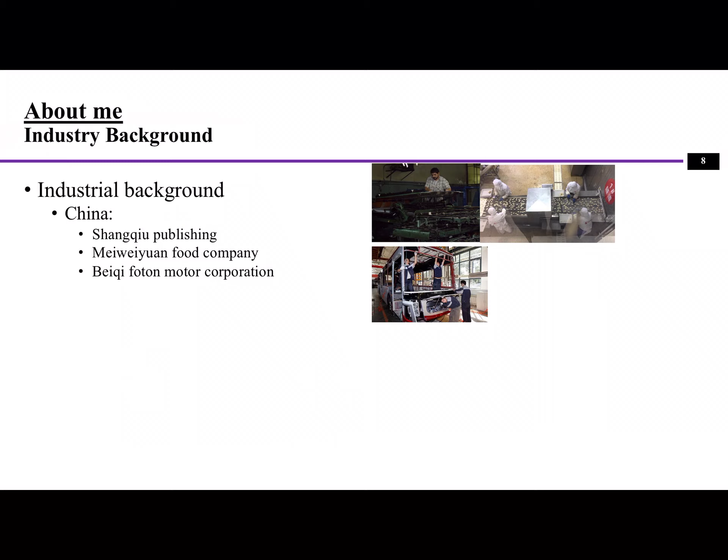In China, when I was in Beijing, I had some internships, and I was working as an intern at Beiqi Foton Motor Corporation. The factory was making buses or tractors. I was there to conduct some projects and also work as an intern to collect some of the data for the management.

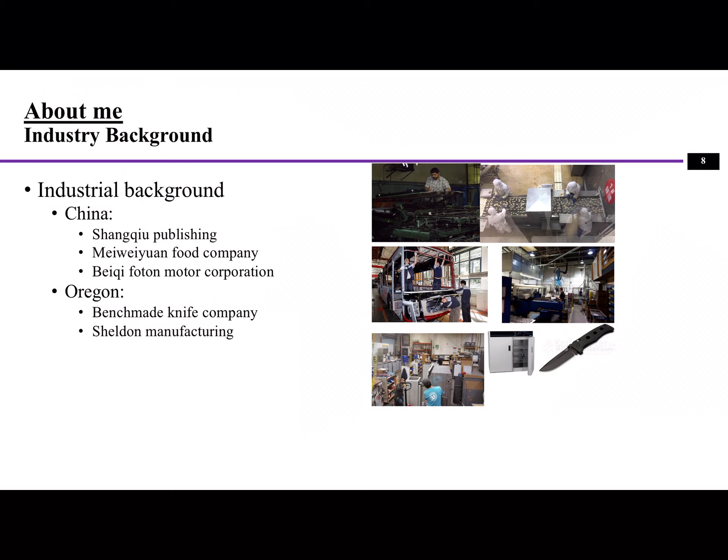In graduate school, I got a chance to work with multiple industrial collaborators in different industries. One is Benchmade, which makes knives used for outdoor activities or military purposes. I also worked on a project with Sheldon Manufacturing, where I spent almost 2 years with their employees as well as the management to fully study the company, from the mechanical or manufacturing process to the management part.

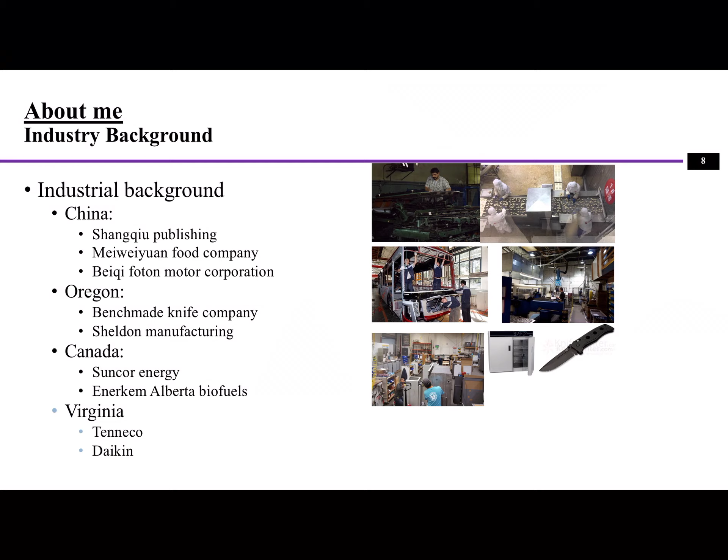In Canada, I was working as a research associate, so I had a bunch of projects related to industrial collaborators. For example, with Suncor Energy, I worked on a project related to GHG emissions related to reclamation. I also developed a process for producing biofuels from municipal solid waste for the Enerkem company. Currently, in Virginia, I'm also working with some local manufacturers trying to initiate some research projects for students.

With all my degrees in industrial engineering, I had different focuses at different levels. For a bachelor's degree, it's very general knowledge. In my master's, I was focusing more on mechanical engineering, studying tool life, machining, and processes. In my PhD study, I focused more on theory and systems engineering and systems thinking, and how that relates to manufacturing process and system improvement.

All right, next let's talk a little bit about what this course is about, and also where this course resides in the manufacturing curriculum in ISAT.

Now let's start with 211. That's your second year course, which you have taken, manufacturing fundamentals. Of course, it had a different name. The topics covered have been principles of making, designing, advanced manufacturing, continuous improvement, and production systems. You get a chance to see a little bit here and there about manufacturing systems.

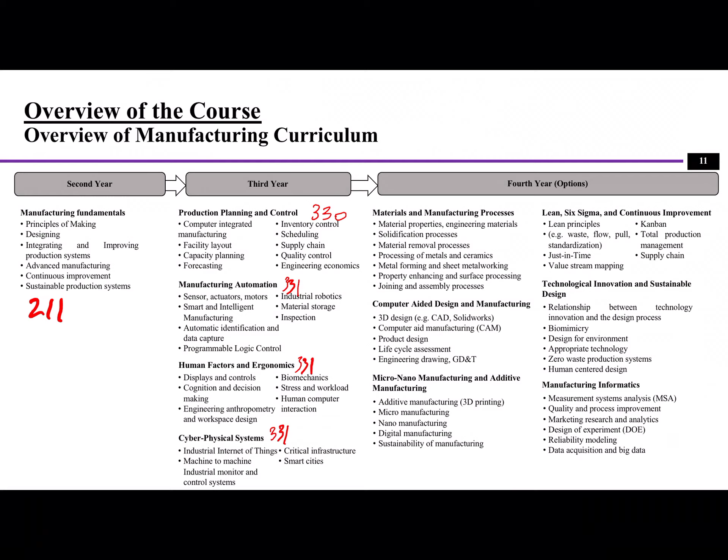There's also a lot of technical knowledge about manufacturing, which includes manufacturing automation, covered in 331, along with human factors and ergonomics, as well as cyber-physical systems. These deal with hard components like sensors, actuators, motors, automated controls, PLCs, material storage, devices and equipment, and robotics.

Another important aspect is human factors and ergonomics, which takes care of the well-being of workers and employees. Cyber-physical systems are more about smart manufacturing systems.

We also have another hands-on lab course, which is 1 credit, mainly about manufacturing automation. That's 303. In 303, you'll get a chance to use sensors, actuators, and other devices to establish a programmable logic control system in order to achieve certain automatic functions of manufacturing systems. So this is the third level, 300-level courses.

If you want to concentrate in production systems or manufacturing, there's a lot more knowledge you can learn, and much of it is offered at our fourth year level. The first one is 430, materials and manufacturing processes.

If you want to know manufacturing, you have to understand materials and how they're used in design and production, as well as manufacturing processes. There are tons of manufacturing processes. In 430, you're going to cover mostly the traditional processes that have existed for maybe hundreds of years or decades.

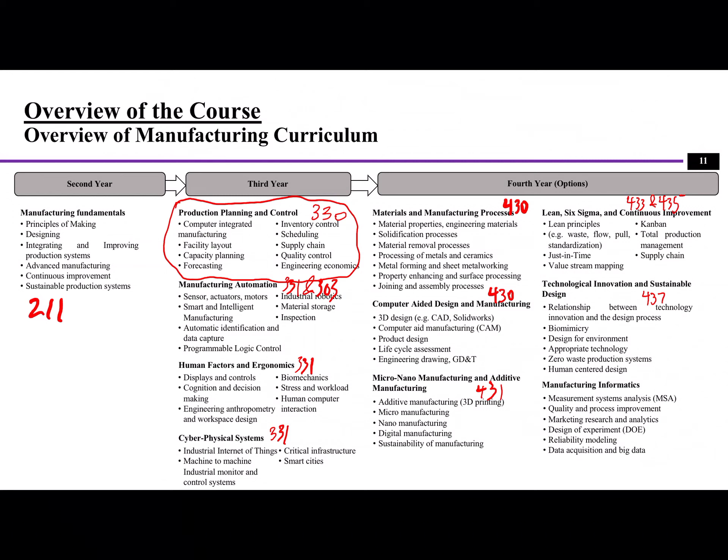In quality control and inspection, we're going to talk about different models of quality control, measurement, and different inspection devices. Lastly, we'll use some lectures to discuss how we can improve the efficiency, cost, economic, and environmental aspects of manufacturing systems.

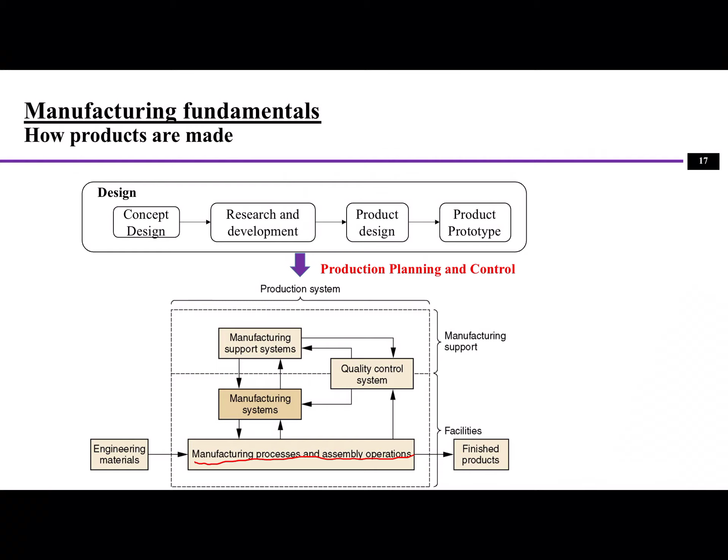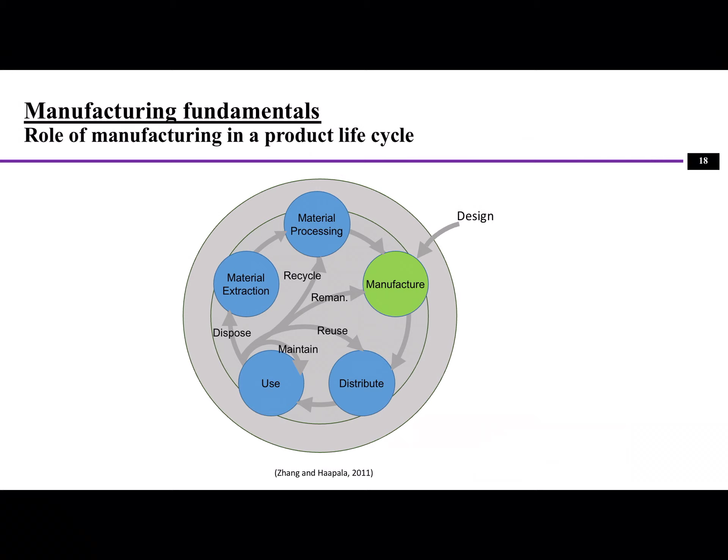Is there a seasonality, high and lows of the sales during the year? So that's the first step you need to understand about the market. That's the demand level. And in our course, I'm going to talk about forecasting, so you have a good idea of how do you forecast the demand over the year.

And the next level or layer is production planning. After we know what is the demand throughout the year, then we will put into practice how to make them, and we'll make a really good schedule. The schedule involves how do we plan out the materials, how do we plan out the processes, and how do we plan out all the other resources in order to achieve all the functions of making those products.

And those will be different lectures in this course. For example, MRP deals with planning out the materials. We do not want to have all the materials available at the same time, even though they are not used at the same time, because the storage of the materials is also a cost. So that's why we want the material to arrive at the time it should arrive, or at the time we want to use it.

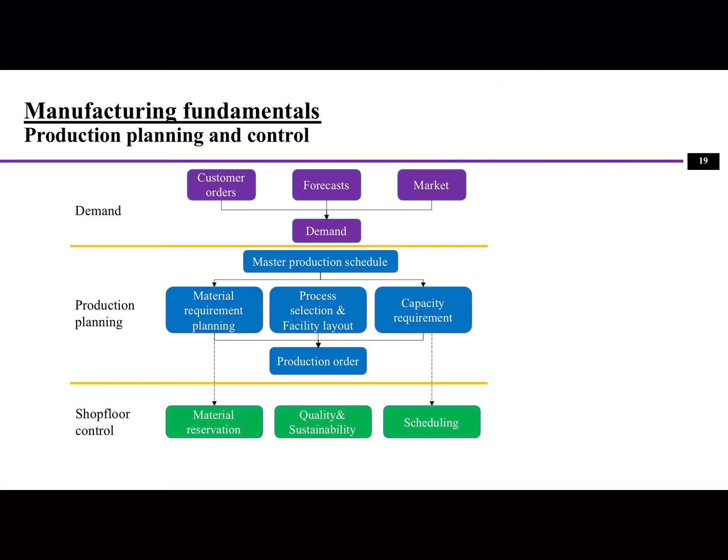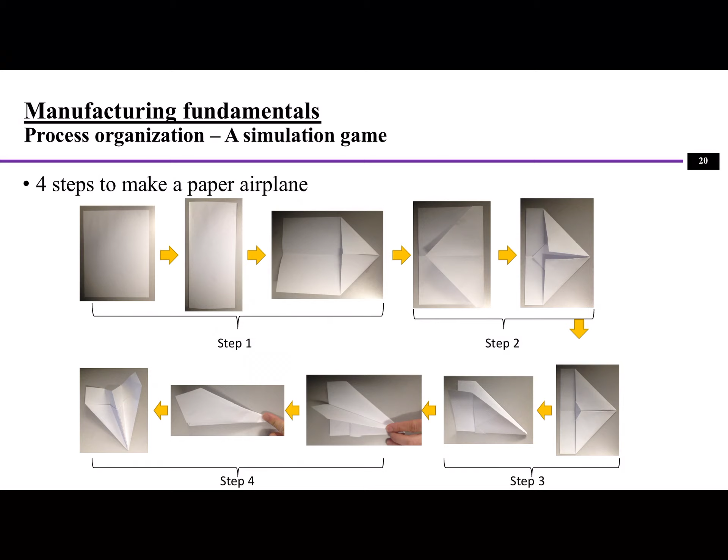All right, usually I start with a simulation game. The game is about making paper airplanes. I designed 4 steps to make a paper airplane. Of course, there are many different ways to make them, but I just use standardized operations or standardized steps to make them. This simulation is about testing, or understanding, 4 different production setups and what are the differences, and also getting to understand a little bit about cycle times. So the 4 setups will be A, B, C, and D. A is about each operator—by the way, there are 4 operators in each of the simulation game.

And in A, each operator will be making their own paper airplanes. Which means that they grab a new paper and then finish all the 4 steps all by himself. Well, B is a bit different. They form a production line. Each operator is only responsible for 1 step of making the paper airplanes.

And C is that they will form 2 work cells. So 2 work cells means in work cell 1, they will be responsible for the first two steps, and it doesn't really matter who finished first. As long as they finish the first 2 steps, they will put it here to give it to the next work cell. And then whoever is available in the next work cell will grab it and then finish the rest 2 steps. So this is called work cell setup.

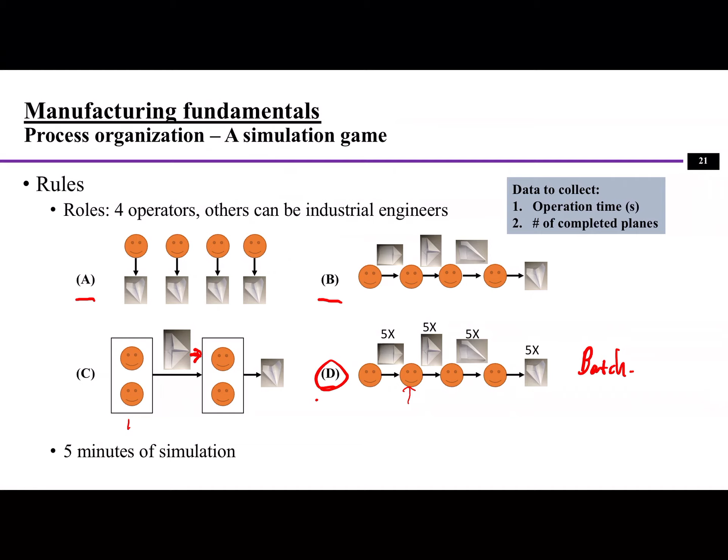Then let's look at the cycle time analysis. So first understand what is cycle time. Cycle time is really the time between 2 successive deliveries, or you can say it's how often a part or a product is made, right? So we say, 1 product was made at time 0, then after 2 seconds another part was made, after 2 seconds another part, and after 2 seconds another part. So the cycle time will be 2 seconds, right?

And the takt time is a little bit different. Takt time means that it's a maximum acceptable time to meet the demands of the customer. So this is more from the customer's perspective. Think you are the customer and you tell the factory that by the end of this year I will need 100 airplanes. It doesn't matter paper airplanes or airplanes. Well, for the company, it has 1 year time, right?

Say you make this request at the beginning of the year and you want it to be delivered by the end of the year. So the factory will have a whole year to make all these 100 airplanes. So that's takt time, right? So takt time equals net time available for production divided by customers' demand. Let's not say daily demand, but customers' demand. Okay.

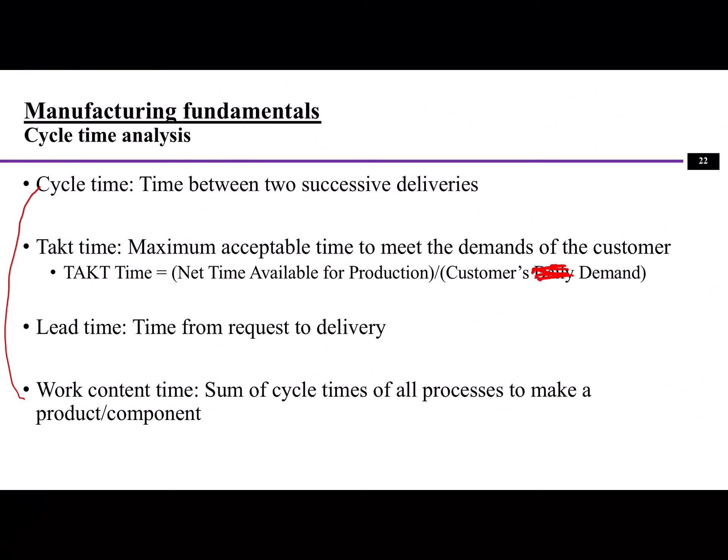All right, so the example is that a customer just placed an order of 75 airplanes and needs to get them 2 hours later. Right, it's probably paper airplanes. Assume it takes about 10 minutes to process the order before putting the order in the production line. It takes another 10 minutes to deliver to the customer's address, while the 75 airplanes were actually delivered 60 minutes after the order request. And also, you can see the process times here. Step 1 takes about 6 seconds, step 2, 8 seconds, step 3, 5 seconds, and step 4, 7 seconds.

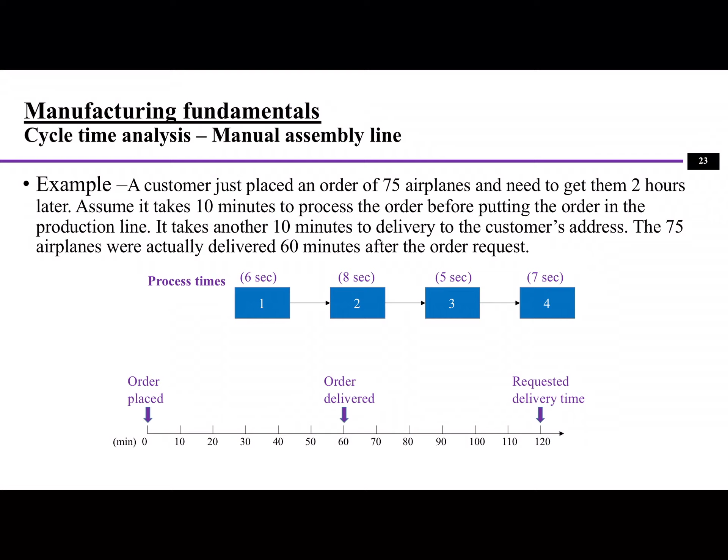Well, here you can see from a timeline, the order was placed at time 0, and we requested the delivery time is 120 minutes, which is 2 hours later. But actually, the order was delivered 60 minutes later, right? So this is what happens. And now let's look at what is the takt time in this case.

So takt time, remember, is the net time available for production divided by customer's demand. Here in this case, what is the time available for production? Well, we asked the products to be delivered after 2 hours, right? So the 2 hours is the net time available for production for the factory. So 120 minutes divided by customer demand. How many airplanes are demanded? 75 airplanes. So it equals 1.6 minutes per airplane. So this is the takt time.

While the lead time means from the time you place the order to the time when the order was delivered, right? So the order was delivered 60 minutes later, which means it's 60 minutes for the lead time in this case.

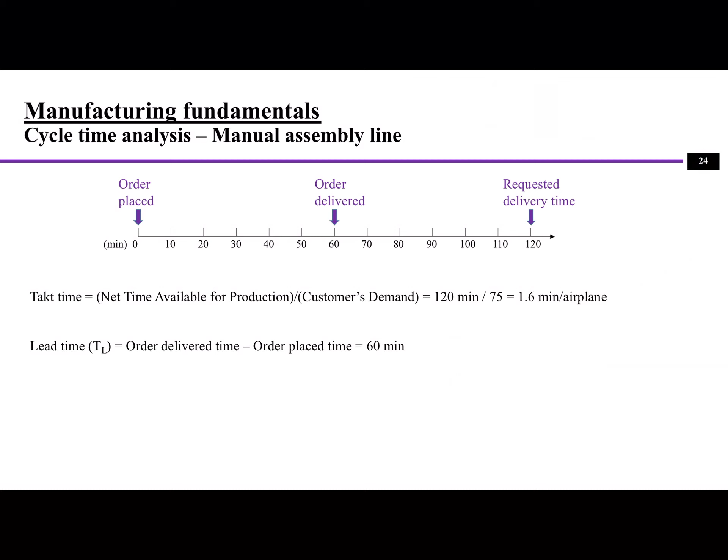All right, next let's look at cycle time, work content time, service time, and repositioning time. What this means. We know that each step takes its own processing time. For example, step 1 takes about 6 seconds, step 2, 8 seconds, step 3, 5 seconds, and step 4, 7 seconds. Well, let's first look at work content time. So work content time means the actual processing times that are required to finish all the steps to make this one product, right?

So let's look at step 1 first. Step 1 here has 6 seconds of operation time, but not all the 6 seconds are actually working on the part. That's because 5 seconds are actually processing the part, but 1 second is doing what? It's just doing the repositioning. What does repositioning mean? Repositioning is the time from finish of the prior operation to being ready for the next operation.

Suppose you are an operator operating an automated machine, right? The first thing you do is put the parts on the machine, then let the machine run the program, and then you unload the part from the machine, right? So during these operations, there are times. Loading the machine, unloading the machine, these are repositioning times because you are getting ready for the next step, right? Sometimes it's also the transportation time, right? You want to pass it to the next operator, so that's also some time.

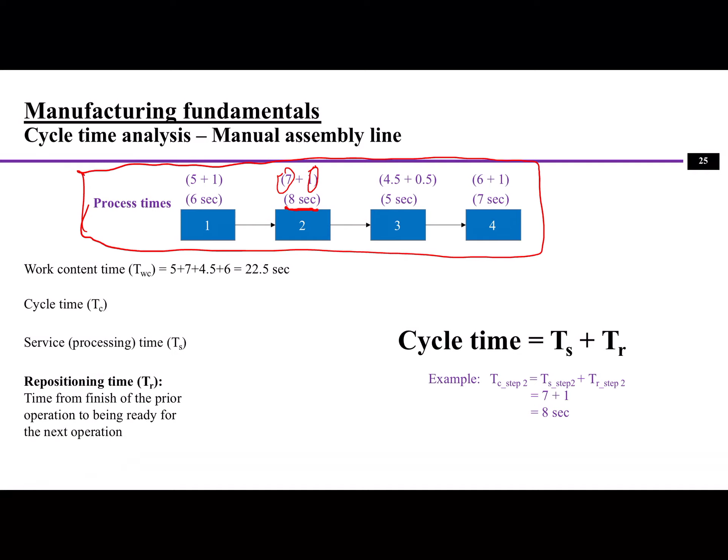So for this whole system, the cycle time actually equals 7 plus 1, 8 seconds, because step 2 is the bottleneck. Just remember, in production systems, the longest processing time determines the cycle time. All right, now we have a better understanding about cycle time, work content time and repositioning time.

Next, let's look at line balancing. Line balancing means you can see all these 4 processes do not have the same processing time, which means some will be bottlenecks, some will be waiting, some will finish early. In this case, we use line balancing efficiency to describe how balanced these processes are, because the ideal case is all the processes have the same processing time.

Now let me ask a question. We have this system. Is there a way that we can reduce the whole system's cycle time to 6 seconds? Yes, there is a way. If we disassemble step 2 into 2 operations, it's probably going to be made of 4 plus 4.

And then we decompose step 4 into 4 and 3. So remember, among all the processes, the longest processing time determines the cycle time of the system. After we decompose some of the operations, the highest processing time will be 6 seconds, so the whole system's cycle time can be 6 seconds. Before it was 8 seconds. This is the way you can increase the production pace or reduce the cycle time.

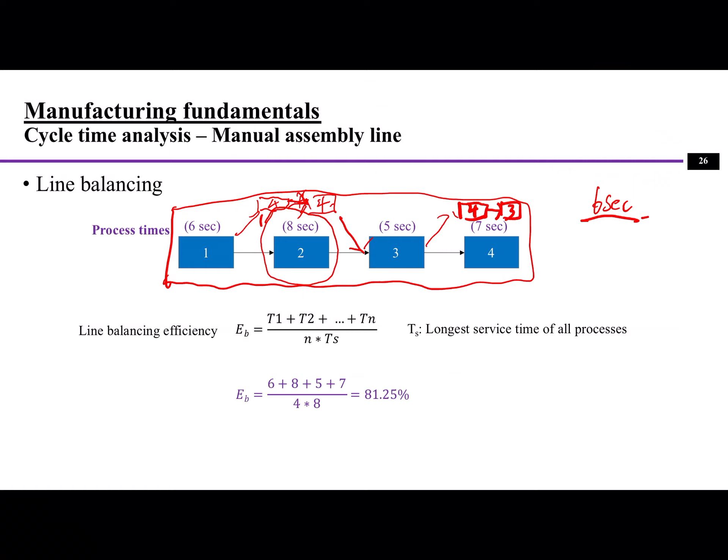Next, let's look at how we determine the number of workstations if we know the work content time and the longest service time. Think of a product that requires a total work content time to make. If we know how much time each process takes, we can use the total work content time divided by the longest service time. Then we know how many workstations there are.

But remember, there's also line balancing efficiency, because the process times are not always the same. So we need to multiply the line balancing efficiency with the longest service time. We use this equation to calculate the number of workstations you need.

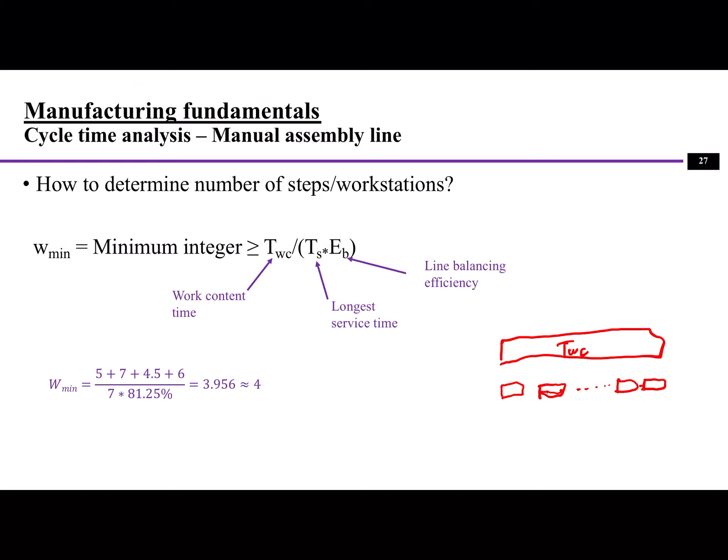All right, now let's look at another example to describe production rate. Production rate means the number of goods that can be produced during a given period of time.

What does it mean? For example, during the 8 hours working hours of the factory, from 9 to 5 p.m., it's not always that the machines are running. There are some breaks, restroom times, or lunch times. These are times with no actual production, meaning the machines aren't running, the production line isn't running, they're not making anything. Only the green segments are actually making parts. So even though we have 8 hours of working time, the actual production time is shorter than the 8 hours.

So here we can use line efficiency to describe this. Line efficiency equals production time divided by total working time. We can also calculate it using cycle time divided by production time per unit. Production time per unit means during the 8 hours, how many units are made, how many parts are produced.

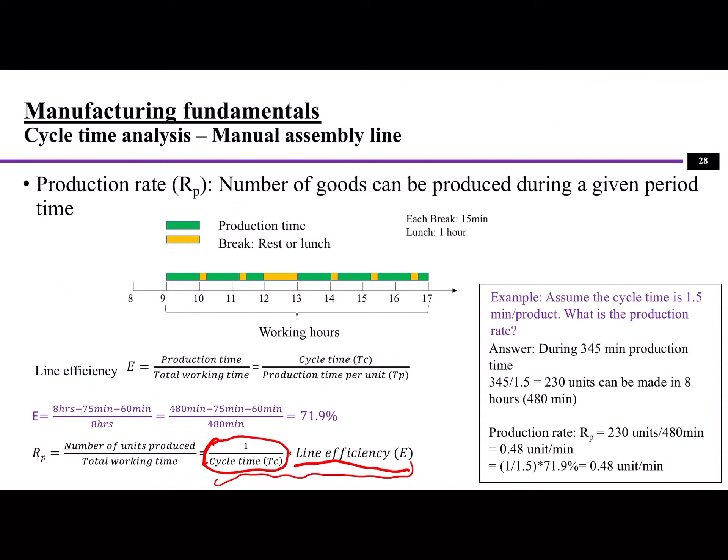All right, now let's look at one example here. A manual assembly line is being planned for a product whose annual demand is 90,000 units. A continuously moving conveyor will be used with work units attached. Work time is 55 minutes. The line will run 50 weeks per year, 5 shifts per week, and 8 hours per shift. Each worker will be assigned to a separate workstation based on previous experience. Assume line efficiency is 0.95, balancing efficiency is 0.93, and repositioning time is 9 seconds. So we've got a lot of information here.

Now it asks us to determine the hourly production rate to meet the demand. Remember, how do we calculate production rate? Production rate equals the number of products that need to be made, divided by available time.

In this case, how many products need to be made? It's 90,000 products. And available time will be how many hours? Because it's asking for hourly production rate, we need to convert all the units into hours. We know 8 hours per shift, 5 shifts per week, and 50 weeks per year. This is the annual demand, and this is the annual available time. From this, we can calculate the production rate, how many products need to be made per hour.

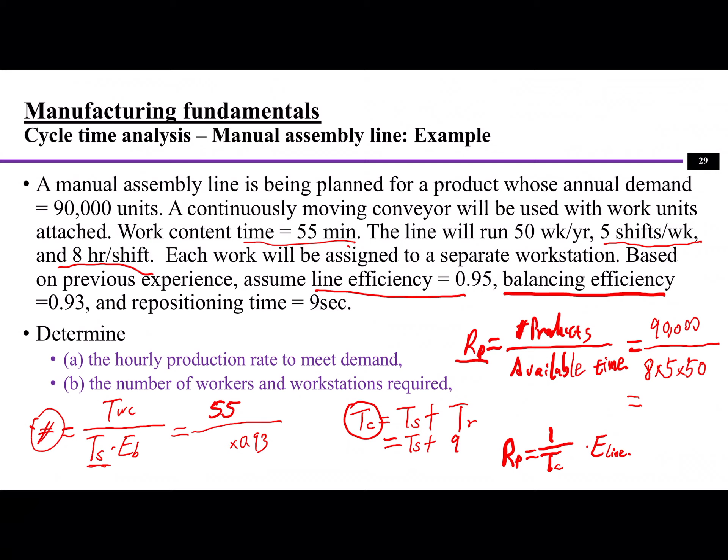Can we find the cycle time? If we can, then we can find this answer. The cycle time equals what? We already know the production rate and the line efficiency, so we can actually find the cycle time, because production rate equals 1 divided by cycle time, times line efficiency. We know line efficiency is 0.95, and we know the production rate, so now we can calculate the cycle time.

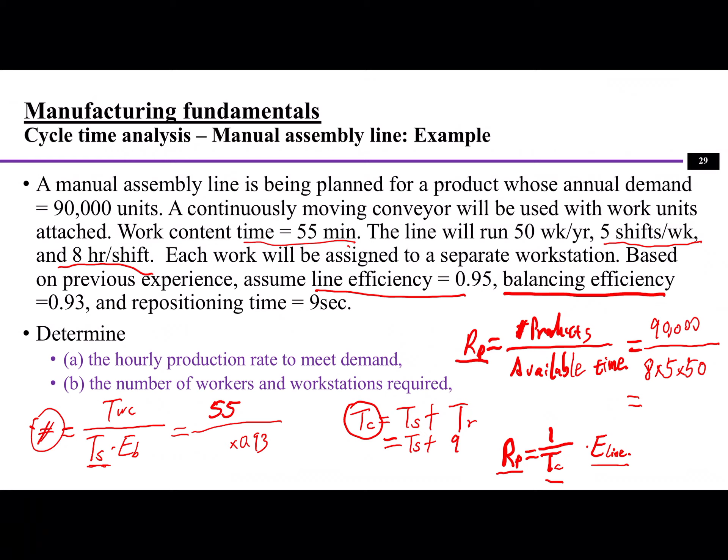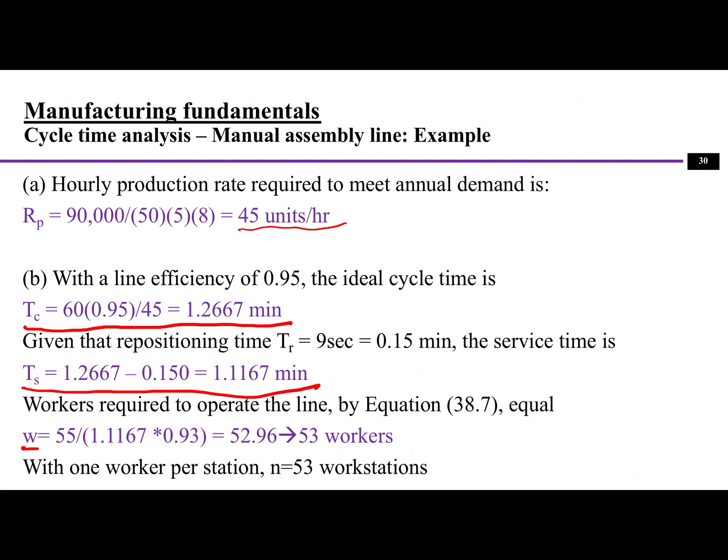From this, we can find out how many workstations we need in this case. So these are the calculations—you can go through them and find out the answer. Here it's calculating the cycle time, then we calculate the longest service time, and then we can find out the total workstations.

All right, so all these calculations from the past are for manual assembly lines or manual operations. So what about cycle time analysis in automated lines? Is it different or the same? First, let's look at the characteristics of automated lines.

As we know, automation has some common configurations. One is the inline configuration, which means workstations are arranged along a transfer conveyor. The parts are on the conveyor or transfer line, going through each workstation and being processed one after another. Another configuration is rotary, where the parts are on a conveyor transfer table or transfer belt that forms a rotary shape, going through one station after another in a circle.

Another setup is the carousel setup. It's similar to the rotary, but it can hold more machines on it. You can watch this video to see how these setups are actually realized in a production simulation or actual system.

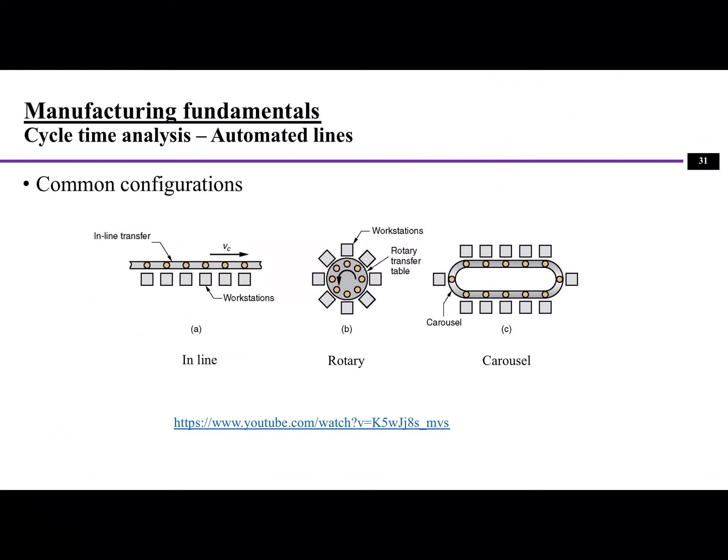As for the cycle time analysis, a lot of it is similar, as long as we understand the fundamentals about all the reasons to calculate those times. For the cycle time in the manual assembly line, it equals service time plus repositioning time. For automated lines, it actually equals the same thing - we find out what is the longest service time plus its repositioning time.

Or sometimes there can be a transfer time. While the production rate, it's the same. Production rate equals 1 divided by the cycle time plus the downtime - cycle time plus the total downtimes. This is because if it's only cycle time, it assumes that the production line is always running without interruptions or breaks, but there actually are some breaks, so we have to count them together. So in this case, you use 1 divided by the cycle time plus the downtimes.

How do we calculate the downtimes? The difference between manual and automated lines is that for automated lines, once one machine breaks down, the whole production line won't be working - it will be stopped. So the downtime frequency can be calculated by adding up all the probabilities of their breakdowns. For example, we have machine 1, machine 2, machine 3, with probability P1, P2, P3, and the downtime frequency probability equals P1 plus P2 plus P3. If P1 equals P2 equals P3, then we can use number of machines times each probability.

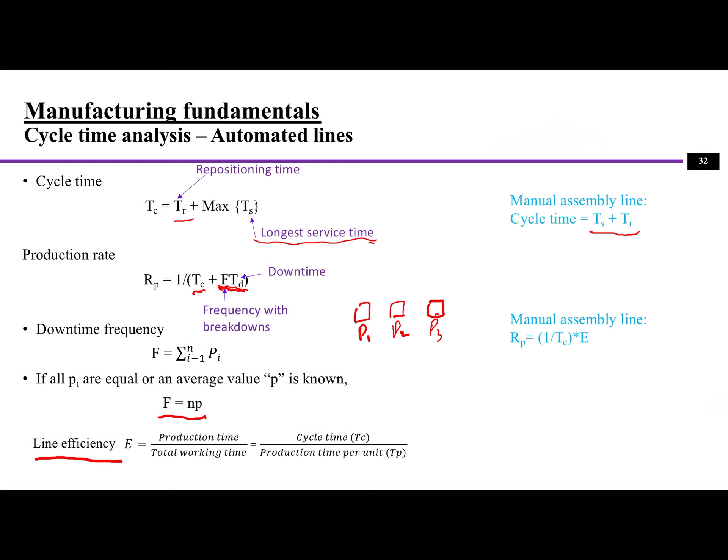Now let's look at another example related to automated production lines. An automated transfer line has 20 stations and an ideal cycle time of 1 minute. The probability of a station failure is 0.01, and the average downtime when a breakdown occurs is 10 minutes. Determine the average production rate and line efficiency.

In order to find out the actual production rate, we need to first find out what the breakdowns are. Breakdown will equal all the probabilities added together for this production line. Because here we have 20 stations, and for each station the failure probability is 0.01, the probability will be 0.01 times 20, which is 0.2.

And then after that we can calculate the actual production time per unit. It equals the cycle time plus the breakdowns - cycle time plus the breakdowns. So it will be 1 plus 2, which equals 3 minutes.

Next, the production rate will equal 1 divided by the production time per unit. Because we want to convert it from minutes to hours, we use 60 divided by TP. So here we got 20 pieces per hour. Then for line efficiency, we use cycle time divided by 1 divided by the production rate, because the production rate already accounts for efficiencies, while the cycle time only assumes the production line is always running smoothly. That's why you can use this equation to calculate the line efficiency.

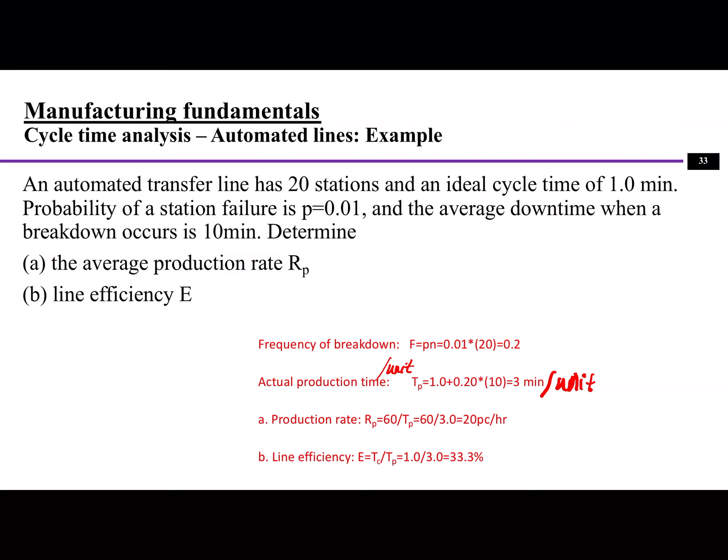Next I'll discuss a little bit about cellular manufacturing or group technology. Cellular manufacturing or group technology means we can group some of the machines or processes together as a cell, instead of spreading them out into different processes. There are a lot of pros and cons, and later I'm going to talk about that. But first, let's look at how we can make cellular manufacturing happen.

The cellular manufacturing only fits with certain criteria - when we have similar products or products that go through similar processes. But how can we tell if they belong to the same part family? Sometimes we can tell from its outlook - if it looks similar, then it probably belongs to the same part family. Sometimes it looks different, but they actually go through similar processes, so we can also put them into the same part family. But sometimes it's not always the case.

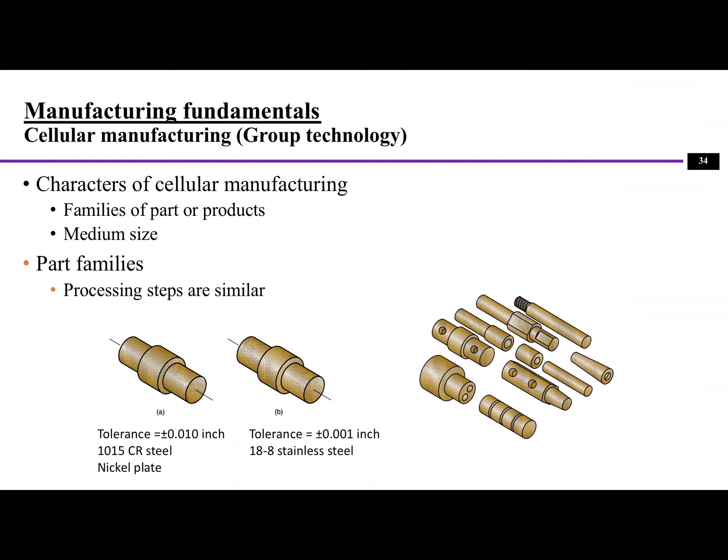So that's why it's not always that the look will determine that the parts belong to the same family. So what are the ways to identify part families? As I mentioned before, you can look at it visually, or you can analyze its processes. In order to make that part, what processes need to be gone through? If they go through similar processes, then you probably can group them together as a part family.

Another way is you can group the part family by the codings. Actually, the codings are developed because of the analysis, because of the data. If part A needs to go through, say, surfacing, drilling, and milling, then it has a certain code with numbers or letters. If another part goes through a similar process, it will give a similar coding. So from the letters and codings, you can see they probably belong to the same family. So these are different ways to identify part families.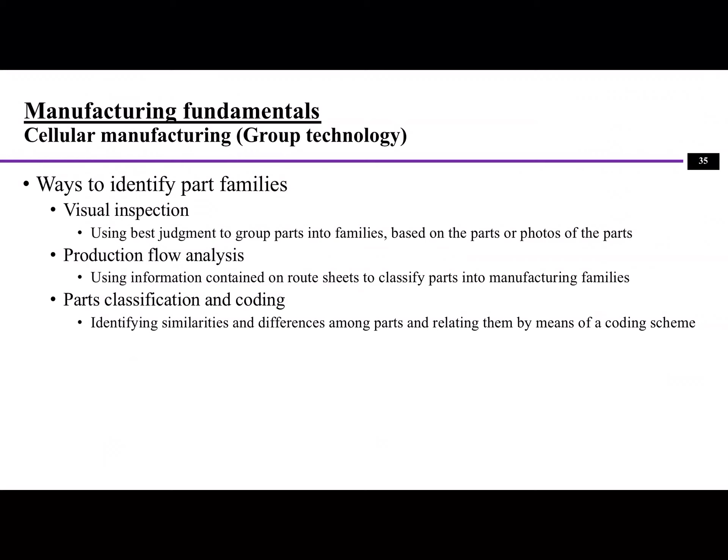Well, the benefit of part coding—a lot of benefits—because right now in companies people are organizing information and using it through computer operations, and computers can only recognize certain numbers, letters, and codes. So it can actually make it a lot faster to get the information you need. It's like your student ID. From your student ID, I get all the other information related to yourself.

So that's why coding can facilitate the formation of part families, permit quick retrieval of part design drawings, and reduce design duplication. Once I know that code already exists or that part already exists, I do not need to draw another design, because that kind of design, or a similar one, already exists.

It also promotes design standardization, which is very important, because if it is not standardized, it's going to give a lot of trouble. Think of threads and screws. You go to the market and you'll find different models of screws, and if you know the model, you just find it. But if you have a machine or equipment that requires just a slight difference from a standardized screw, and you cannot find it on the market, you've got a big problem.

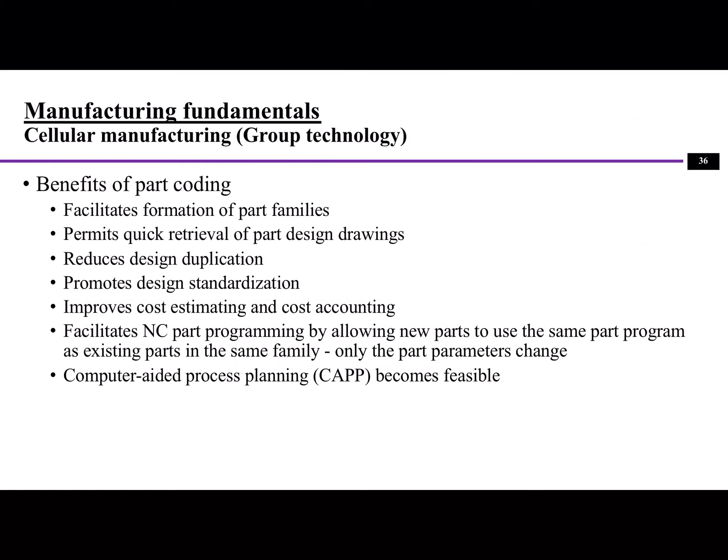And the last benefit is that computer-aided process planning becomes more feasible, because once all the codes are developed, you can make this kind of planning easily. Well, next, let's look at a composite part. A composite part is used to describe a part that is composed of several processes together.

Just to make this one product or one part, it's actually going to go through several processes together. As a production planner, you probably don't want all these machines so isolated that the operator has to go here and there and back again to make this part. Maybe you can group all these machines together so the operator can just use one machine after another to make the whole part. Then it saves transportation time, and also it saves setup times.

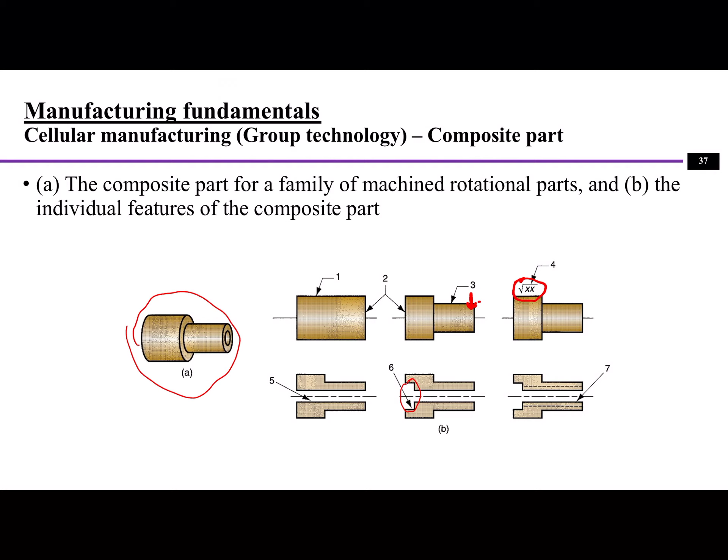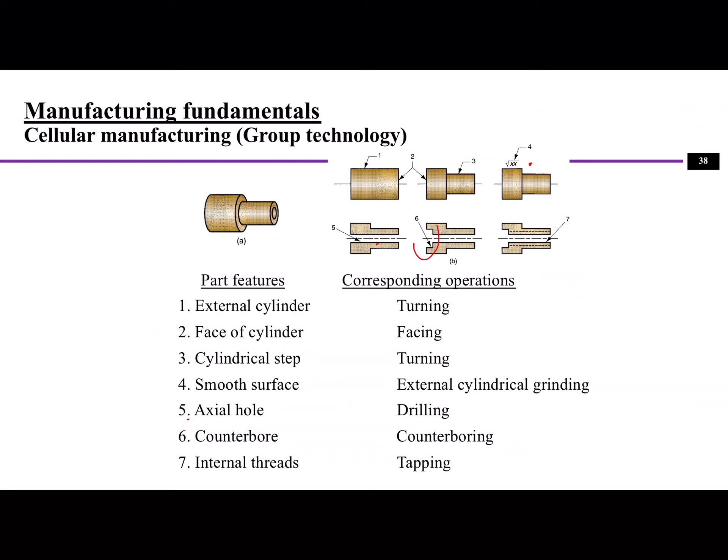These are the operations actually made for each of the part features. You can see the external cylinder is made by turning, the face of the cylinder is by facing, the cylindrical step is by turning, the smooth surface is by grinding, the hole is made by drilling, the counterbore is by counterboring, and the tapping will make the threads.

All right, next let's look at how to design machine cells. We're going to look at it from both the manual and automatic operations, and also sometimes it's in a mix.

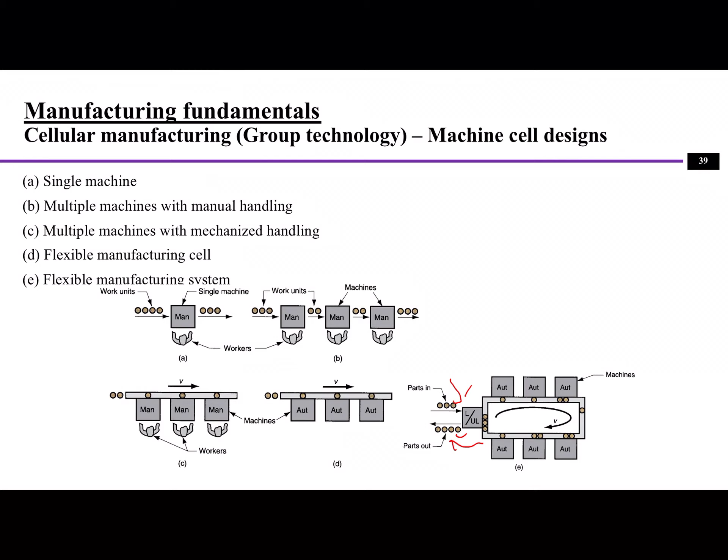D will be replacing all the manual operators with automated machines, so that's another setup. E will be more like a carousel setup, so the parts go in from one direction and then come out from here, after it goes through all the processes along this production line.

Now, the pros and cons about cellular manufacturing. The pros include: standardizing tools, fixtures, and setups are encouraged in cellular manufacturing, as I already explained. Also, material handling is reduced, since you do not have to move here and there to get the parts. And the process planning and scheduling are simplified.

If you had to plan out or schedule each single step of the composite part separately, there's going to be a lot of work. But if you think of it as a work cell that makes that composite part as a whole, then the scheduling work will be a lot simpler than before. Also, work-in-process and lead times are reduced, because once you put all these processes together, it actually reduces the changeover times and setup times.

There's also higher worker satisfaction in group technology cells. This is because traditionally, if you are the only worker in the work cell, or the only worker at one station, a lot of times you feel lonely and you do not have communications, and it's hard to communicate with others. After a while, it's going to cause some psychological effect on yourself.

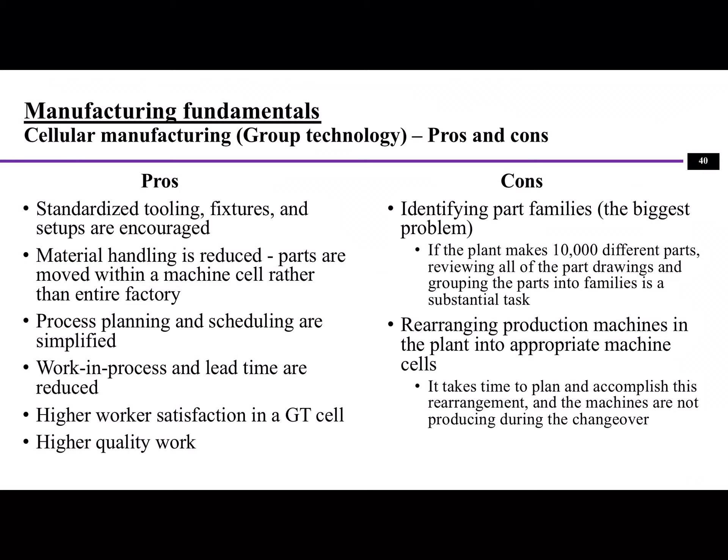All right, last we're going to talk about flexible manufacturing systems. So flexible manufacturing system means that the manufacturing system can actually adapt to the environment to make different varieties of products, because the machines are available or have that kind of flexibility to make them. Those kinds of machines usually include CNCs. CNC means computer numerical control, or AGVs, robots, or some other computers.

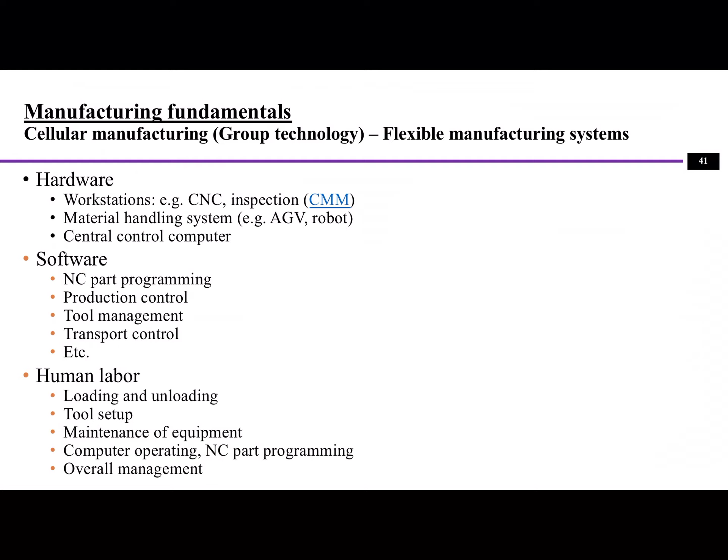And how do machines work? The machines actually use part programming. So whether it's a cutting process or machining process, it actually uses part programs generated by the designers, right? And also, flexible manufacturing is not only hardware and software; it also involves human labor. So the human labor will also be flexible enough in order to conduct different operations.

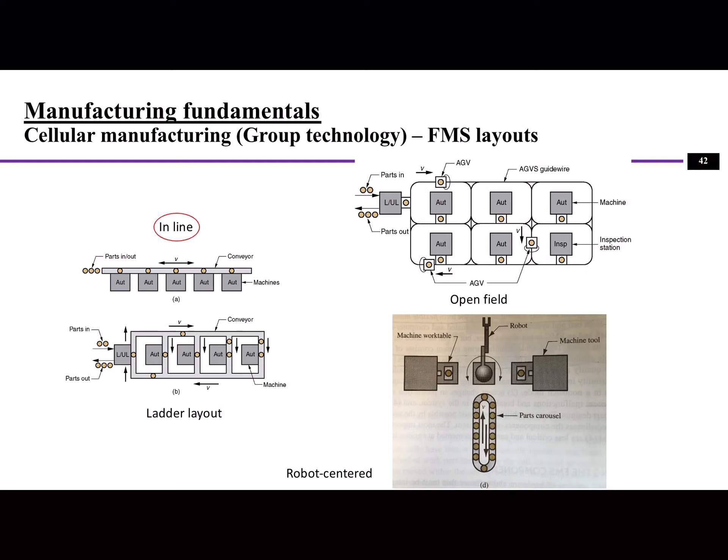So let's look at the transfer line first. Usually the transfer line is mostly used when we mainly make one single product, or a very limited number of product models, because the transfer line does not allow that much time for changeovers and setups. It just goes one by one, right? So that's why it is a very good system for low variety but high volume production.

Think of a food processing company, right? Every day you're going to produce a lot of food, but it's all the same. So that's why the setup will never be changed, or is rarely changed, unless they are making a different food or have another setup, right? So this is a transfer line.

Well, the flexible manufacturing system will be on top of the transfer line. The flexible manufacturing system builds in certain flexibility of the machines, so they can easily configure them to make another model of the product, and it can also make larger volume compared to standalone machines and flexible manufacturing cells. But because of the setups and changeovers, it won't be as high volume as the transfer lines.

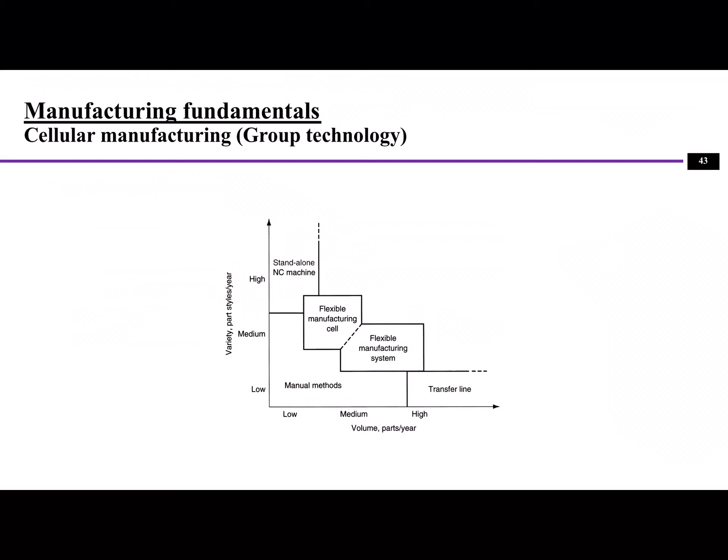All right, so that's about the different systems fitting the different production environments. And for this class, we mainly talk about cycle time analysis and also cellular manufacturing. These are the key components in this lecture. All right, that's it.